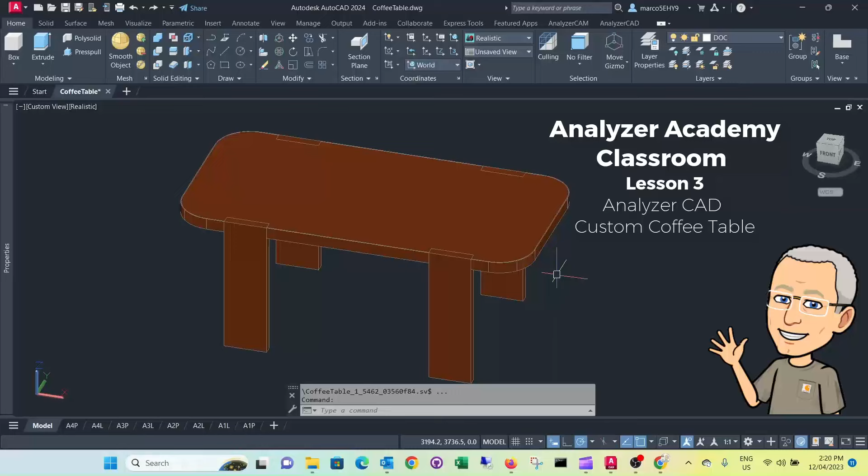Lesson number 3. Here we want to draw a coffee table. It's an oak veneer top with solid edges, 2mm solid edges, solid legs, and it's all dowelled together. Start with a new drawing. Now the best is to draw a small plan.

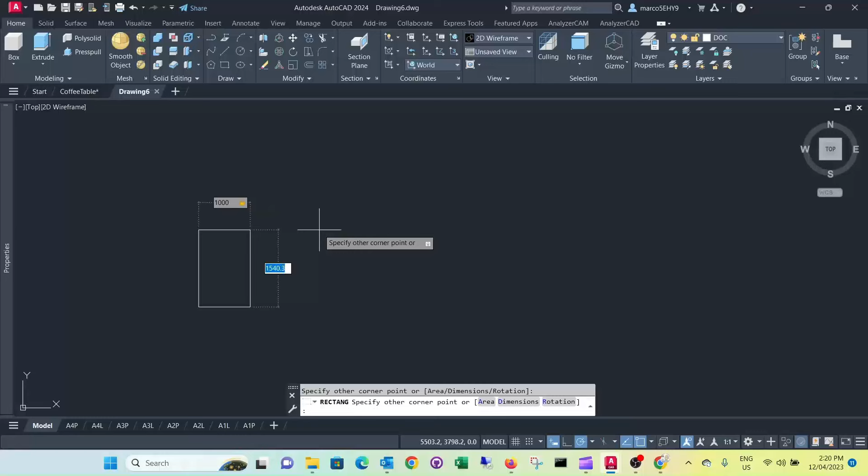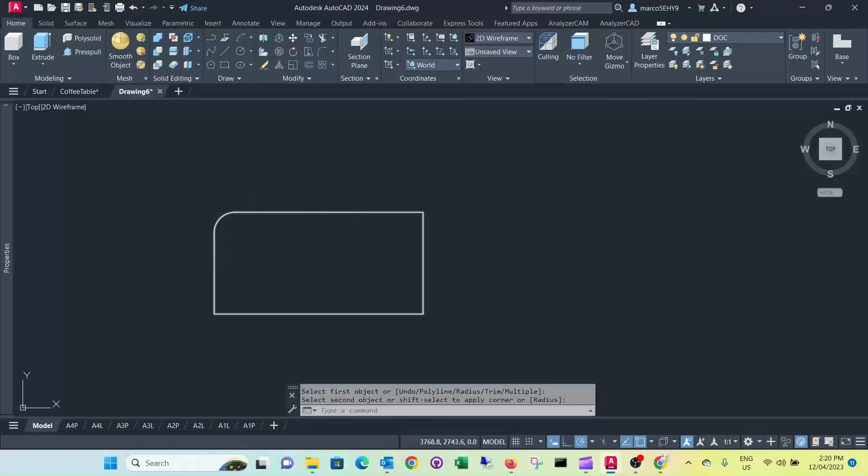Table is 1000mm long and 500 wide. And we have rounded edges, so we fillet them at 100mm radius. 100. Now we want to draw the legs. Again, they're 120 wide and 25mm thick in solid.

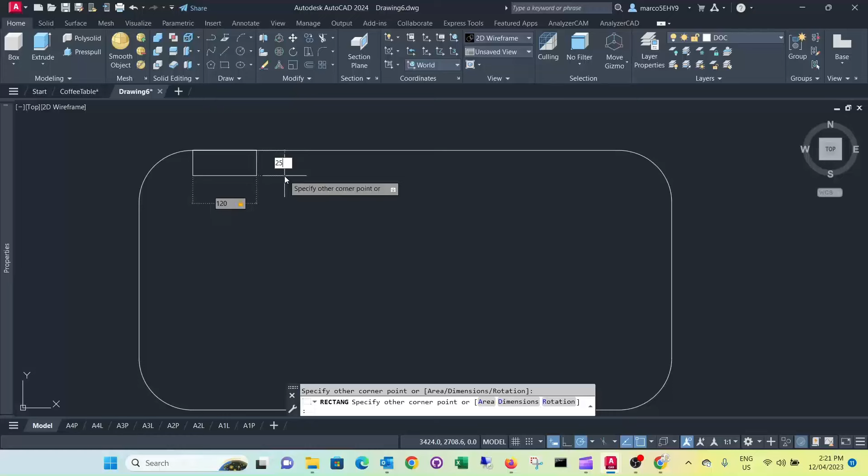Now we probably don't want to have them right in the corner here where you have to glue the edge on. It would probably be too much tension, so we want to have a bit of a flat spot for the edge to be glued on. So we just move them another 50mm internally, another 50mm. Okay, now we're going to mirror them around.

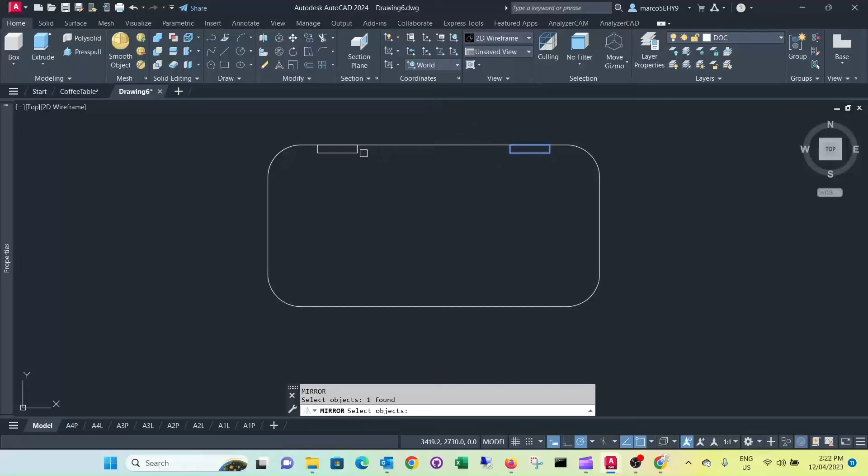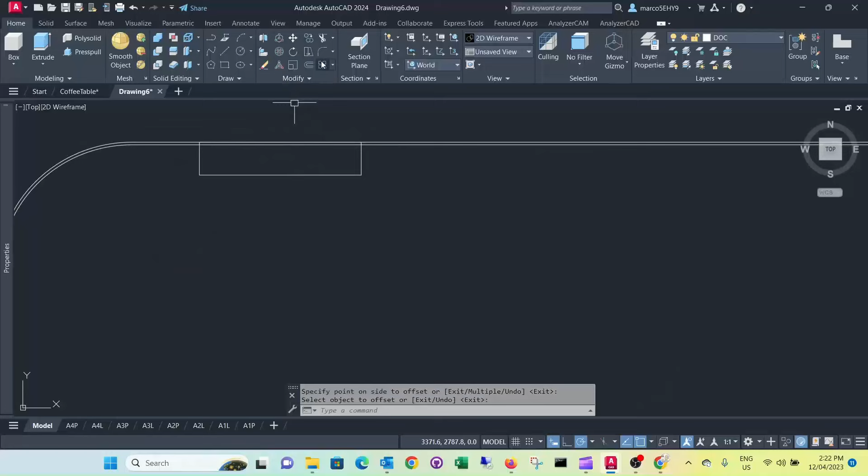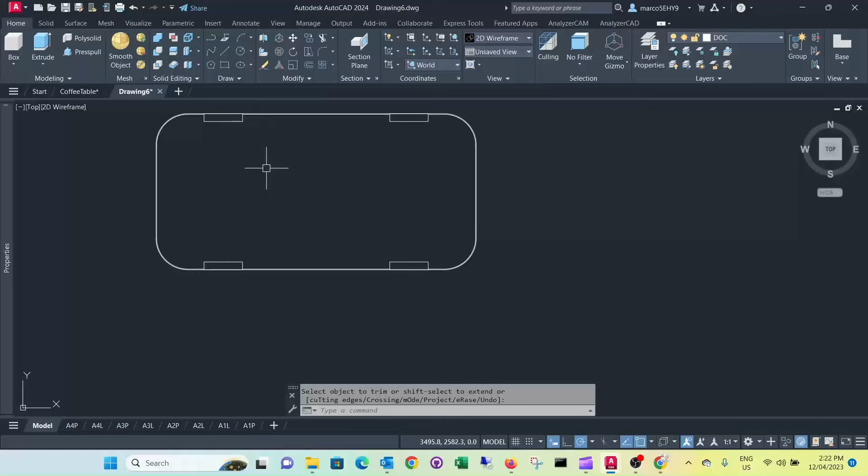And we also want to show the 2mm edge, so we just do a simple offset there. This time 2mm. Probably don't want to have an edge here, so we trim that off. So now we're basically ready to draw things in 3D.

For the core of the board that needs to be edged, the easiest to use would be Presspull. Just click in the internal area of our table, and since it's veneered board 32mm, it's going to end up with 33, so we put a thickness of 33 in there. Now we want to elevate it to the right height.

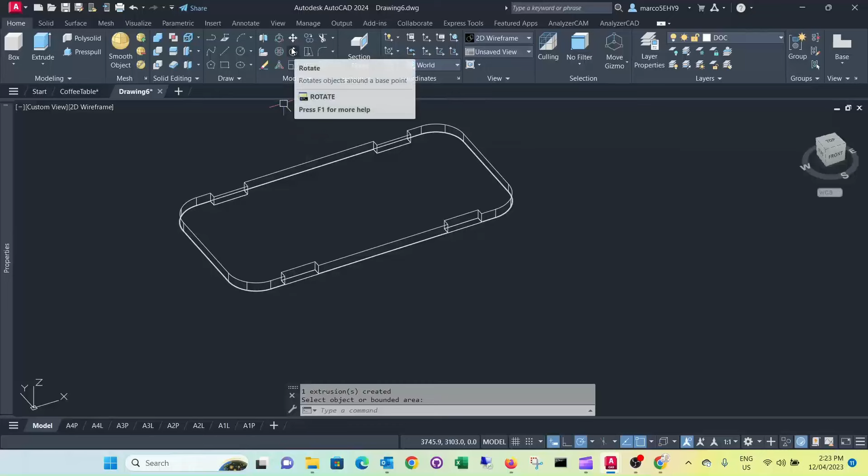It's 400mm high, so we can simply use the 2D move command. We click anywhere on the drawing, we move it up to 400. Now it's obviously 33mm too high. We could have made a calculation, or we can just simply move it down. We use this corner, we move it down.

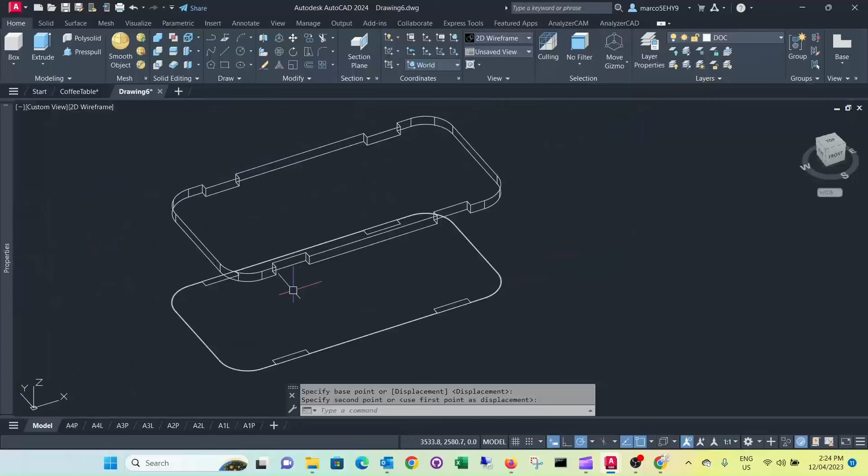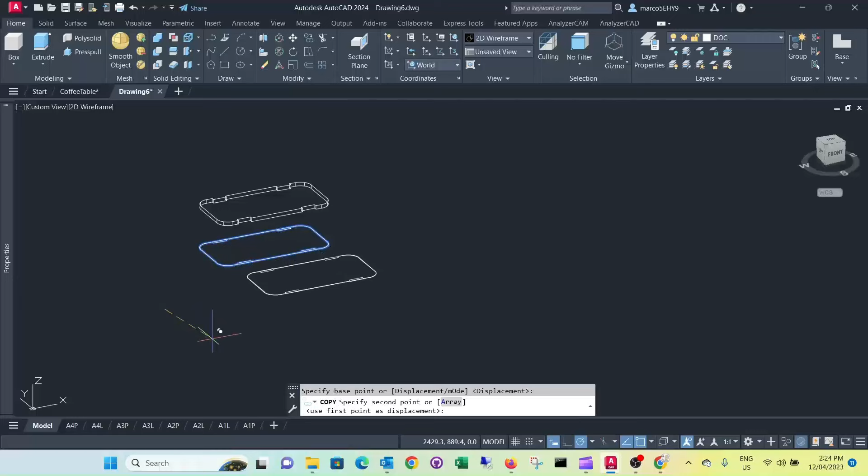Now what we probably want to do is copy our 2D drawing, because we want to extrude some edges as well. It's a bit easier to use the extrude command, so we want to do a copy of this. Just copy that across. Now the next thing would be the legs. We just draw a box for that. And we bring it up to the top surface here.

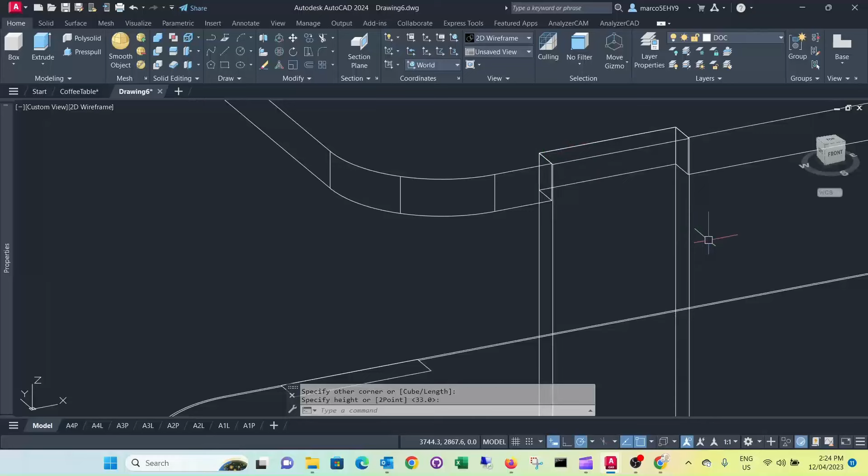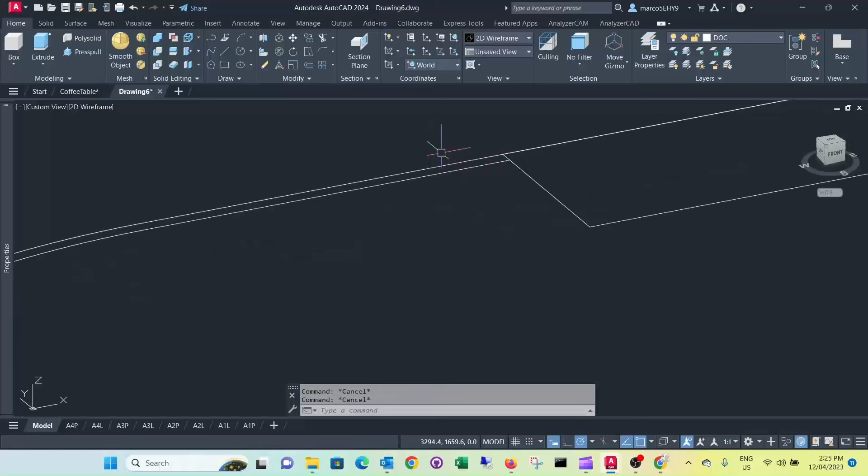Now our edges, they're a little bit hard to press pull because there's a very small area here, so press pull doesn't work that way. If you try to use press pull, it won't give us that internal area there. The easiest is to draw a polyline and extrude it. That gives you a solid. So all we need to do is trim some of the lines here.

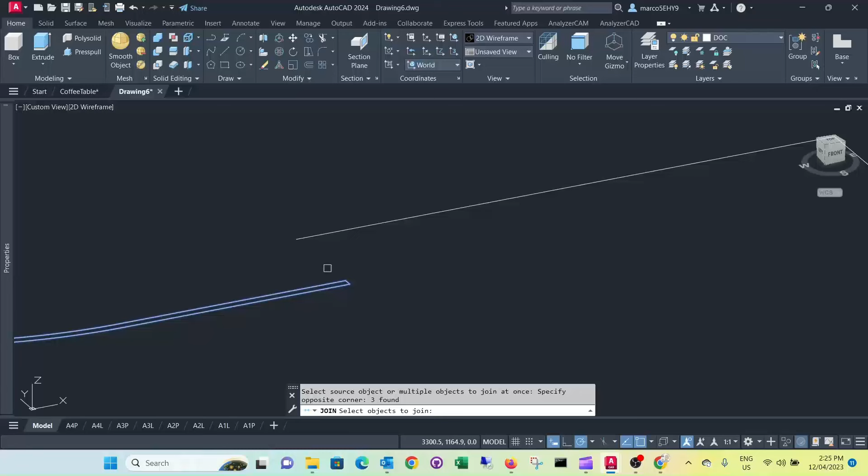Now we're able to join those lines together. Use the join command. Select the lines. Now this one is a polyline that can be extruded now to 33 millimeter. 33, and that's basically our edge now.

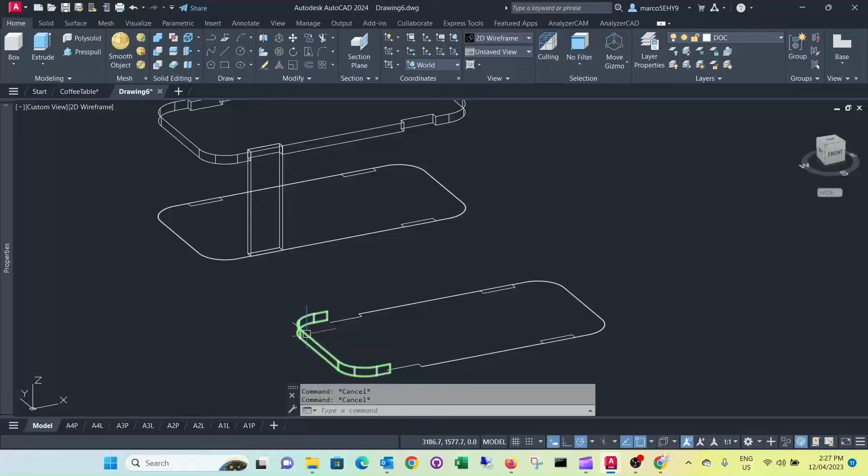These edges are only for display purposes. AnalyzerCAM manufacturing has its own edging system, so we don't really need to make it part of the Analyzer assembly. So they're just for illustration purposes, once we do our 3D drawing, we want to show edges there. The next step now would be to put part properties on those two parts. Use AnalyzerCAD part properties.

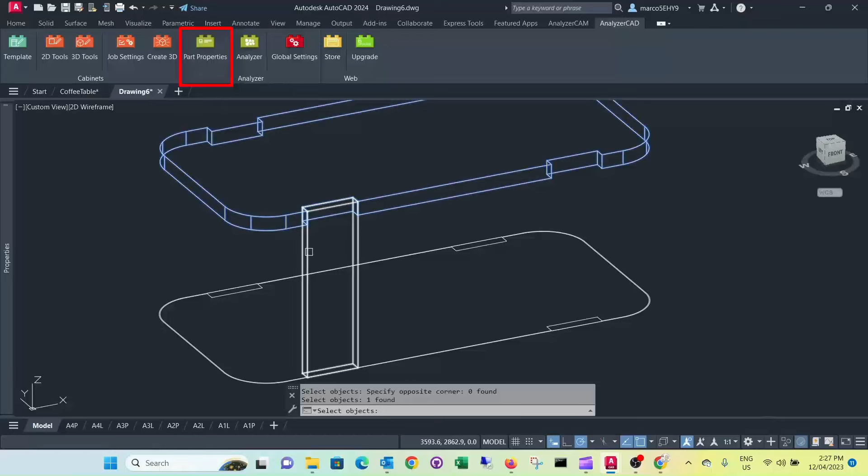We select the benchtop first, and then the leg. So part name, we call it top. Material. It's any material. You can select something from the existing code, or you can just enter your own material. Call it now oak veneer particle board 32.

We don't want to nest it, so we don't need to put anything in user 1. User 2 is usually your edges. We want edges all around, so we just simply select A. And now the most important part is we actually have to give it an assembly. There's no assemblies at the moment, so we select new assembly. We call it coffee table.

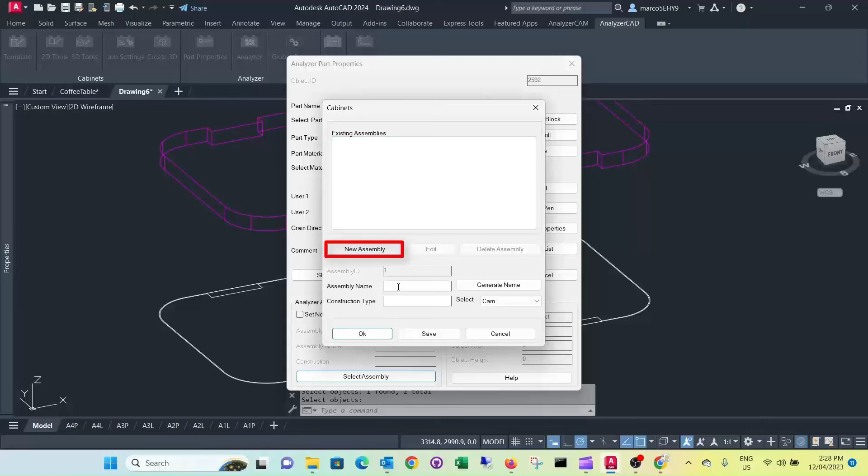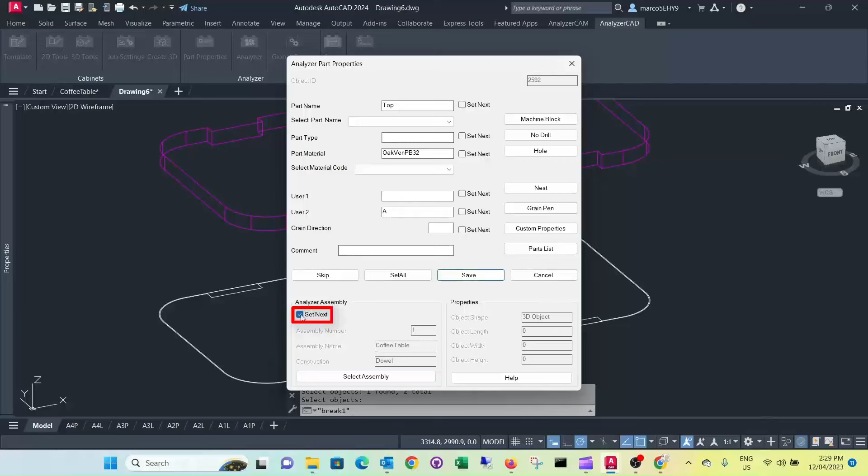And we use a construction type. In this case, we want to use dowels. And that's all. Now it's been copied into the part properties. Since the next part is part of the same assembly, we select next. We save this one now. So our next part now is our leg.

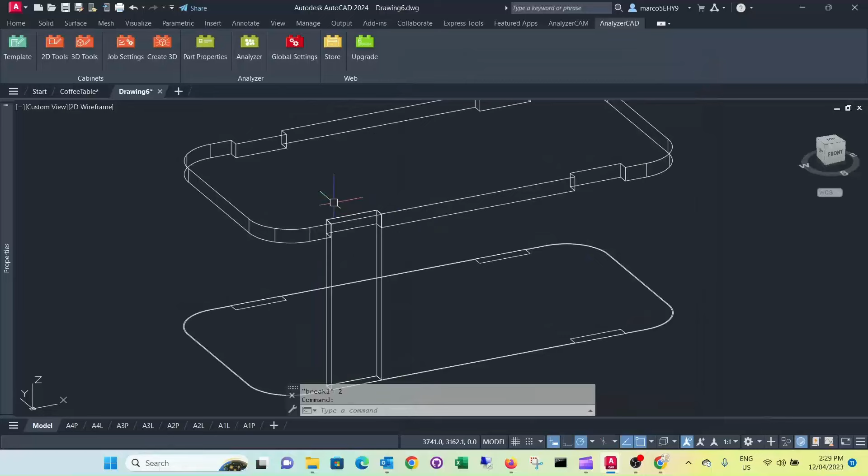The material is solid oak. We save that. That's all we need to do. Now those legs, obviously, we can mirror them around. Saves us adding part properties to 4 legs.

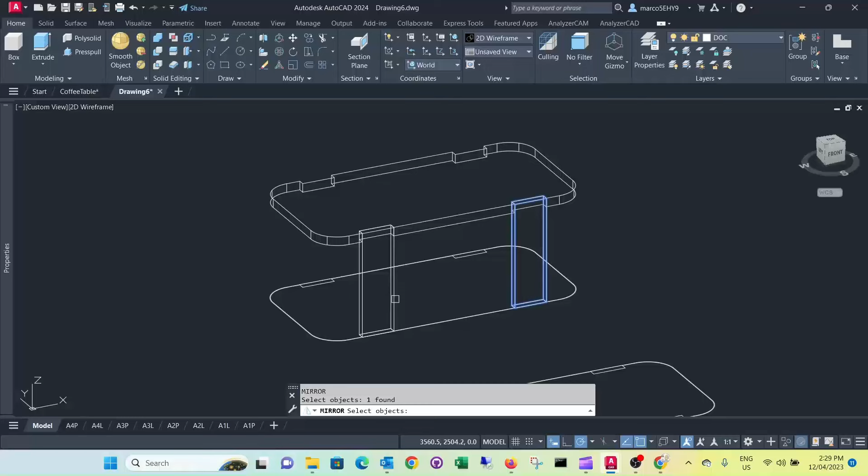We just simply use the midpoint of that line there. It should give us exactly the center line of the table. The next step is to complement the drawing by moving the edge to the place where it has to be. Just move.

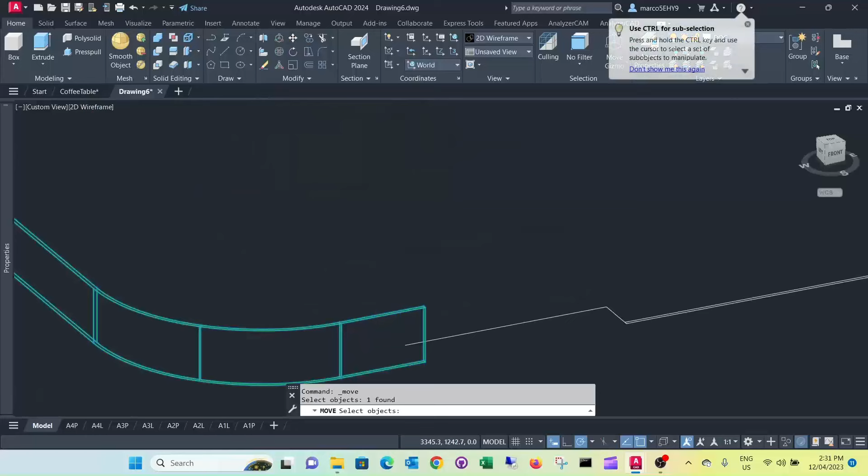And we select the point that we can select as well on our table. Now we just mirror that to the opposite side. Select the edge. Select the midpoint. And now we just need to complement this edge here. So we can simply use our box command.

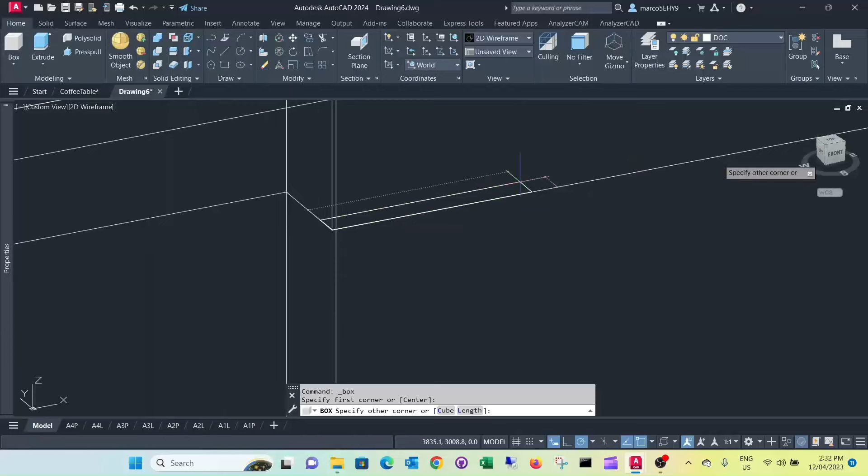Select the bottom here. And we use this corner here. We select it diagonally. It gives us a box straight away. Can match the two properties. Match properties. Okay, so now they're on the same layer.

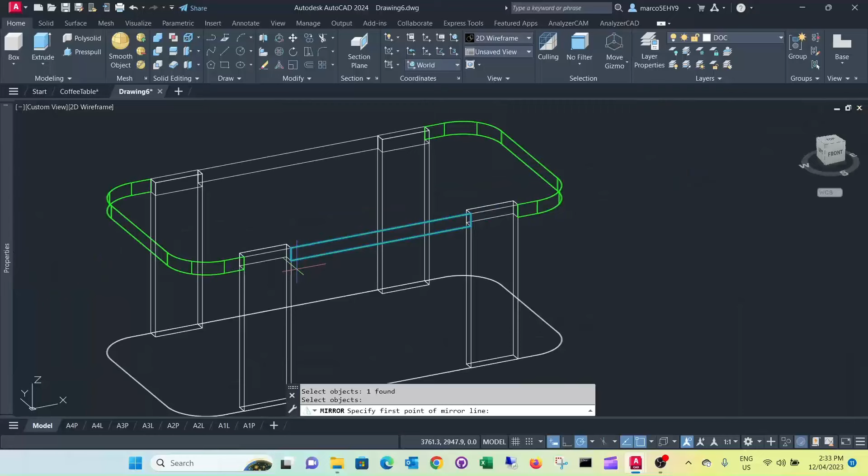We move that around to the opposite side. Select the midpoint. And use our polar tracking for this.

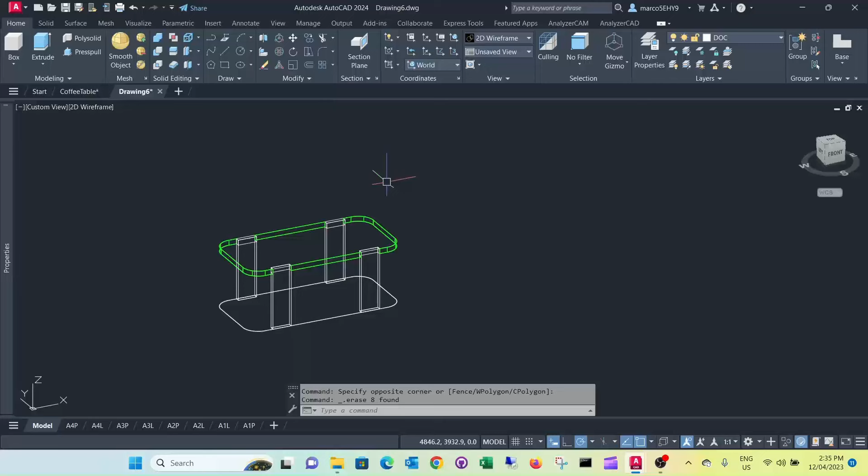There's a couple of commands you can use in order to extract sections or plan views for our workshop drawing. So we can select the top view. We use Flatshot for this, but first we want to change the layer that we draw in. In our case it would be board, depends on your company settings. We select Flatshot or simply type it in.

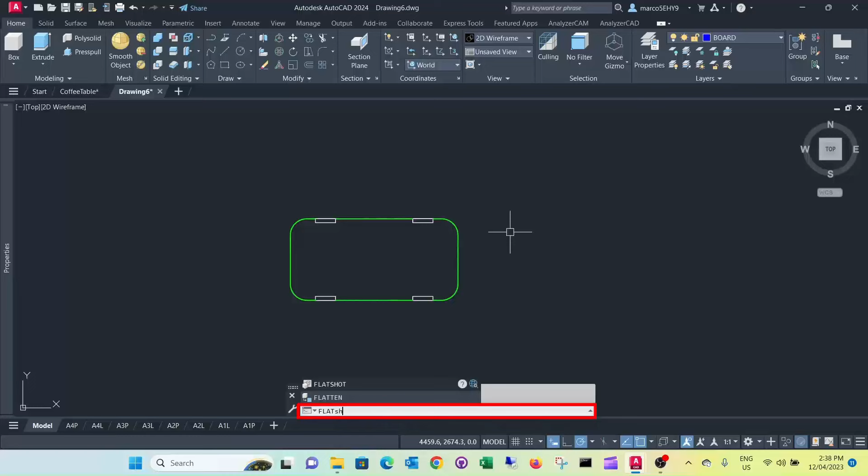Now we want to insert it as a new block. The color we want to keep by block. Obscured lines, we don't want to show them. Now if we press create, we place that somewhere here, and it's drawn it as a block that we can manipulate or move around.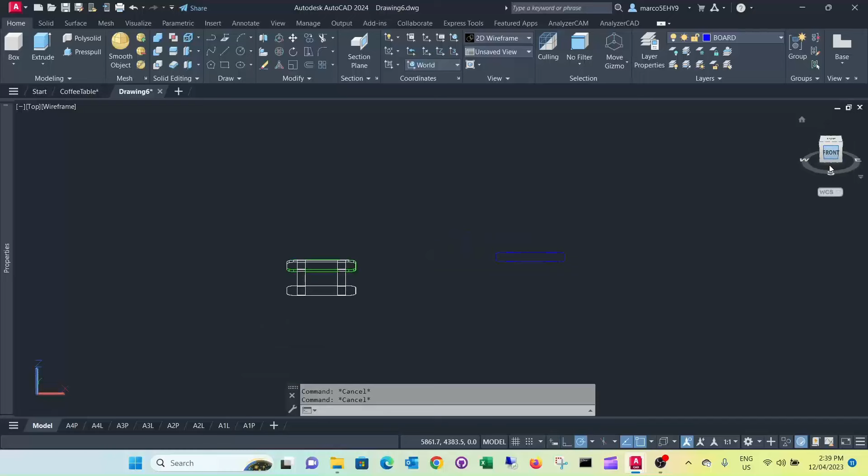We can do the same thing for the elevation. We just change the viewpoint, and we use Flatshot again. Basically we use the same settings for this. We create it. Now it shows it sort of edge on, so if you use your viewpoint orbits, you can actually place it close to where you want it. You just place it somewhere near the plan view.

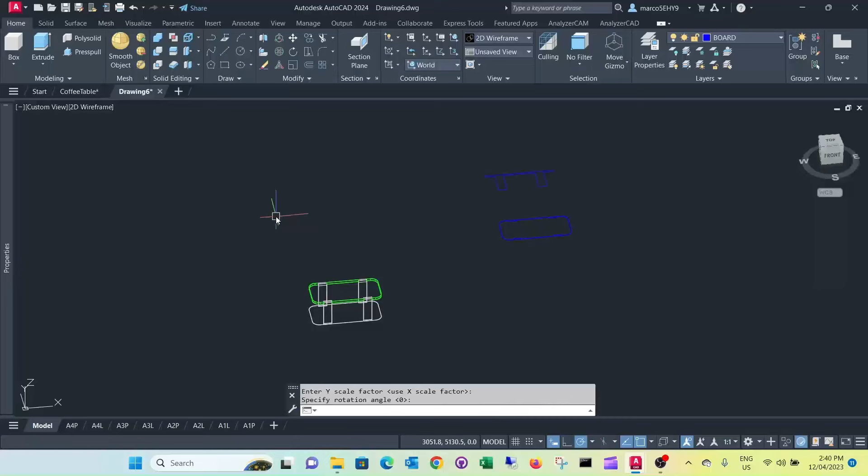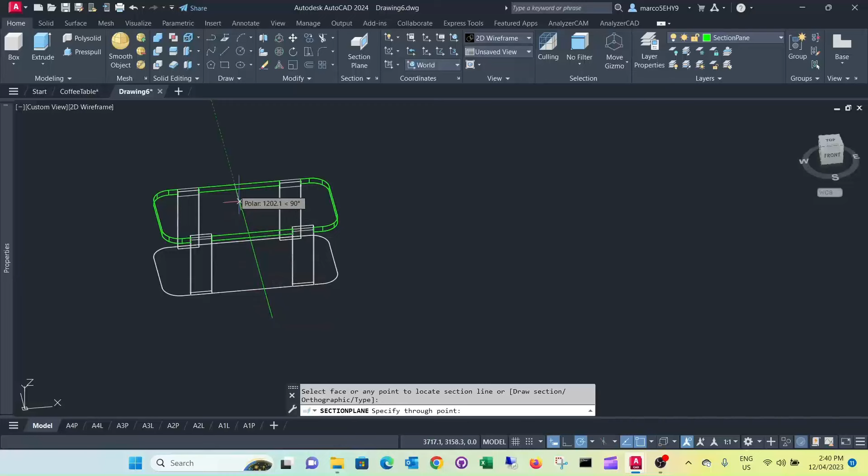In order to do sections, we use the section plane command. Again, I would change it to another layer. I've got one already ready here called section plane. Select this, and now you can put the section plane into your 3D drawing where you actually want to cut that table.

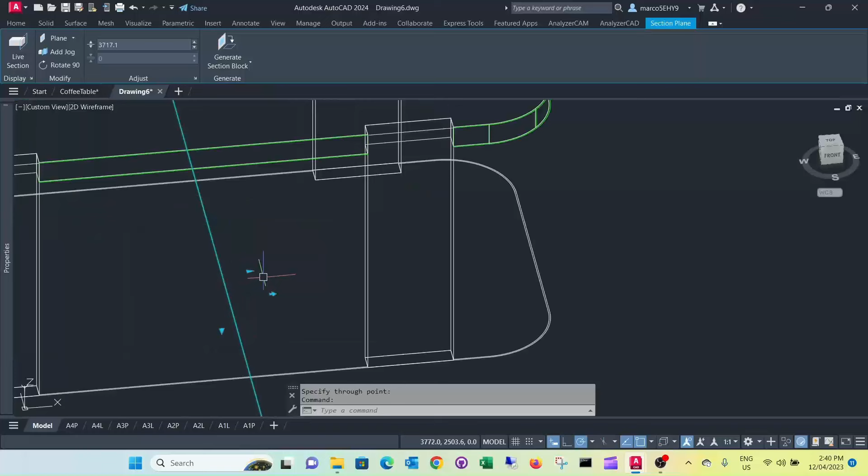Now, by default, it selects live section, so it cuts part of it off. I generally don't use that. I turn live section off, and now my table's complete again. It gives you directions where the view is going to go and where it's going to cut, and you can manipulate this around. If you use other things like conceptual, it actually shows you the whole plane where it is and how it cuts through the table here.

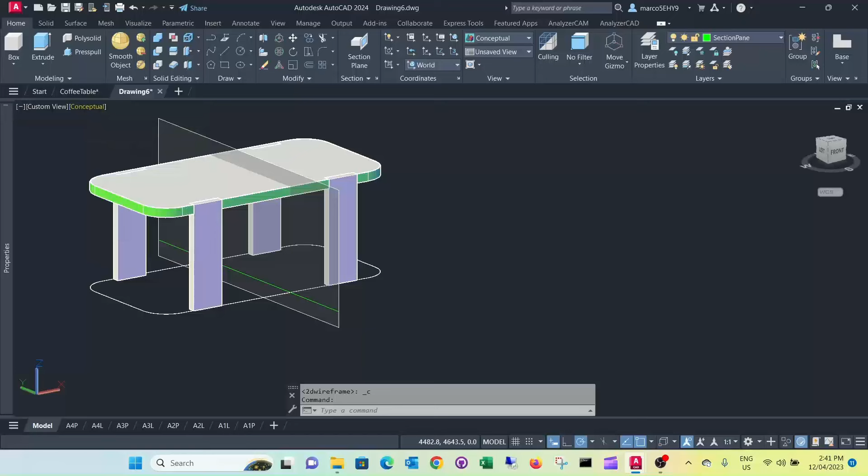Now in order to create that section, we click on the line. It gives us the option to generate the section block. Now this is quite a powerful command, and it gives you a lot of settings there. And you can manipulate things around. Basically, you want to do a 2D section. You want to click all the objects.

If you have complicated drawings and you want to have a section only of part of your objects, you select those objects. Otherwise, you just include all objects. You want to insert it as a new block. And the section setting, this is now quite important. So we can say, all right, we want to have it by a certain layer, we have our board layer that we really want to have it drawn into, so that the color will be by layer, our board layer.

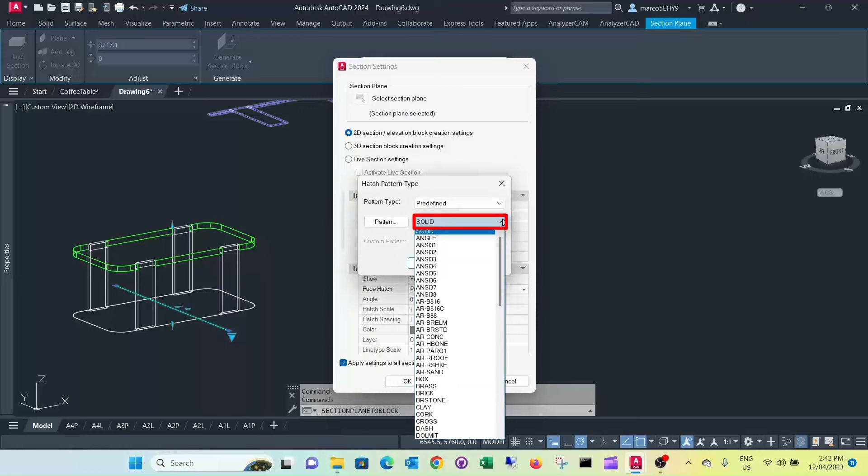We can actually use an intersection fill. That means we can do hatching on boards. The preset is solid. We can select something like a cross line section, like an ANSI 31. Probably have to change the scale a little bit to 5, depending on your drawing styles. The color, I think we want that by layer.

The layer, if you have a hatch layer, you can choose that. The background lines, you want to show them, yes. The hidden lines, we probably don't want that. We turn that off. And again, we want that in our board layer. The cutaway geometry, no, we don't want to show that. And curve tangency lines, no, we don't want to show that either.

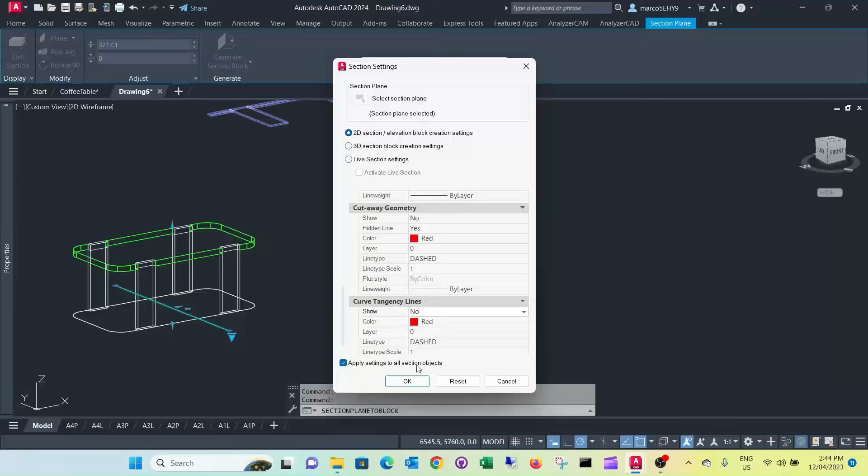You probably want to save this in your template, so you have that all set up for your company standards. It's okay. We create our section, we just place it somewhere there. And again, it's a block. Going to plan view. The only thing it doesn't do is it doesn't draw your bottom lines, so you have to do them yourself. Probably want to go into a different layer here, possibly your wall layer or your document layer.

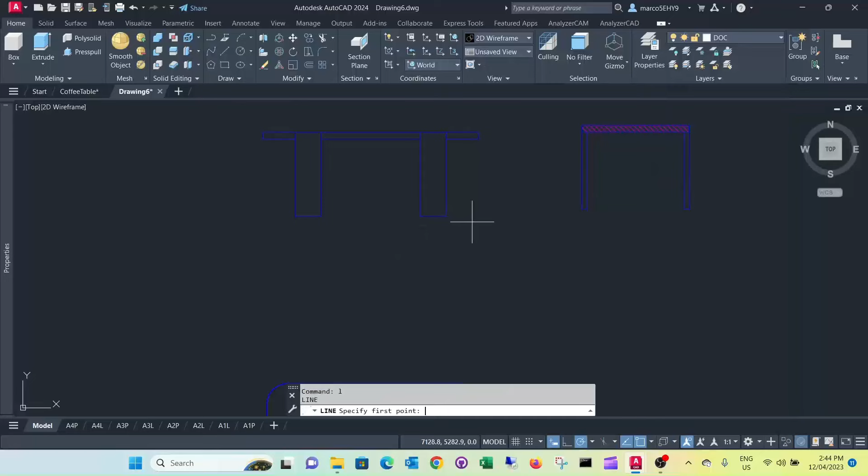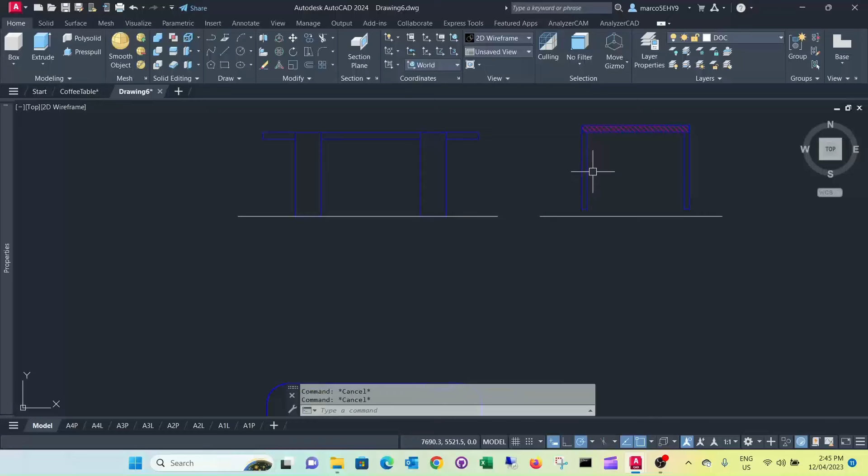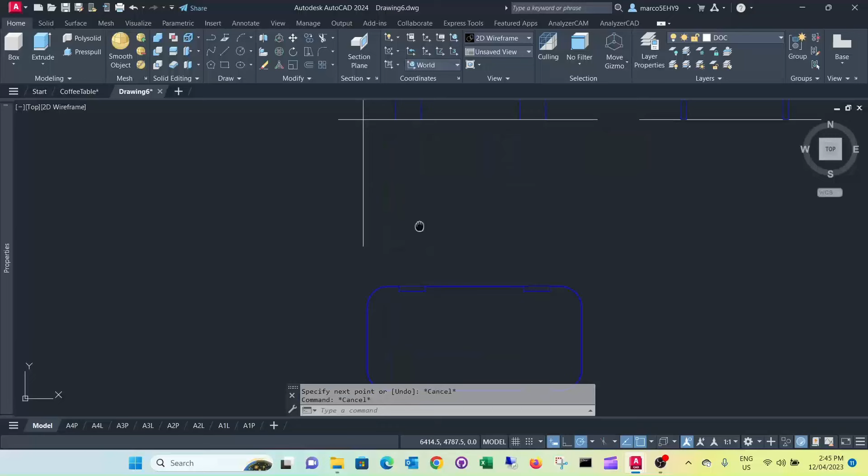Draw a line, just to complement the drawing. It makes it a bit easier to read. I want to extend this line here. We line up our section. Same thing here, we want to do a quick construction line. Use the line command for that. Line up that edge here with our plan view.

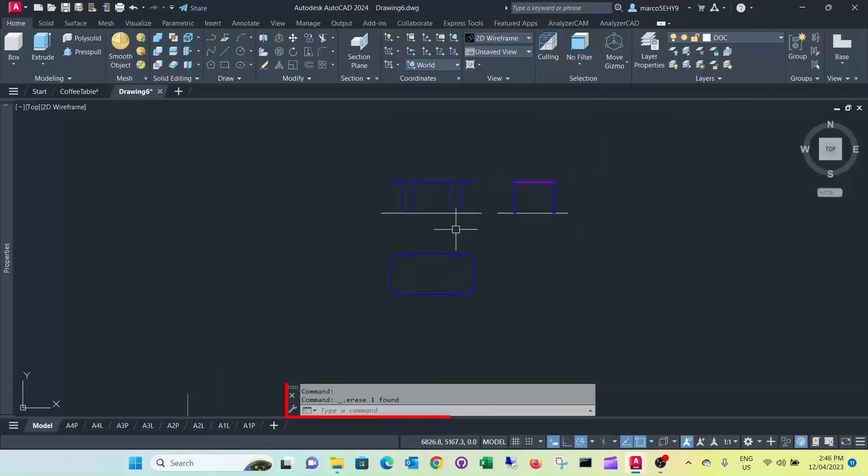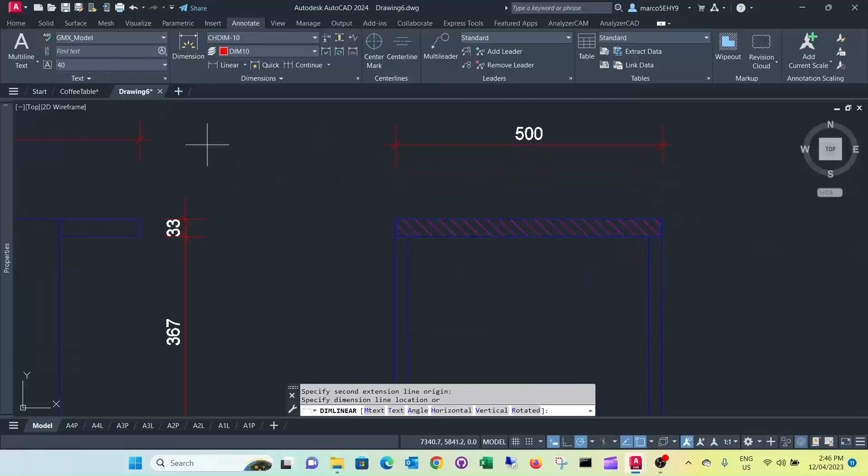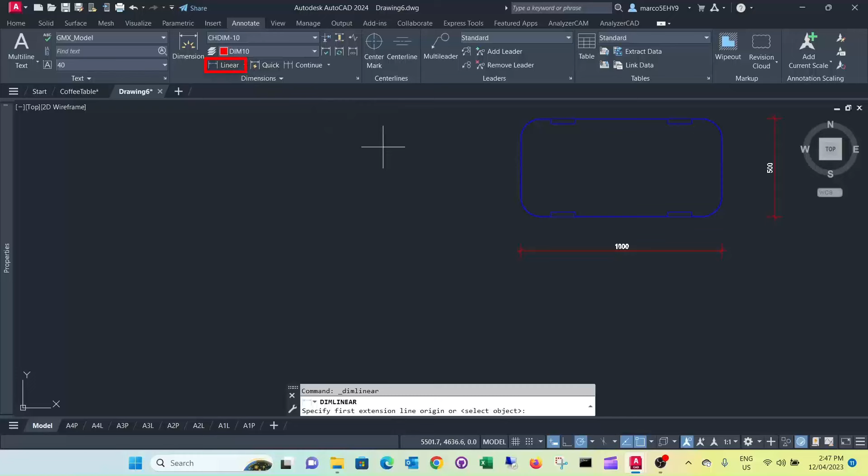That's all nice and in order now. Now you can basically do whatever you want. You can put measurements in here. Then you can put it into your layouts.

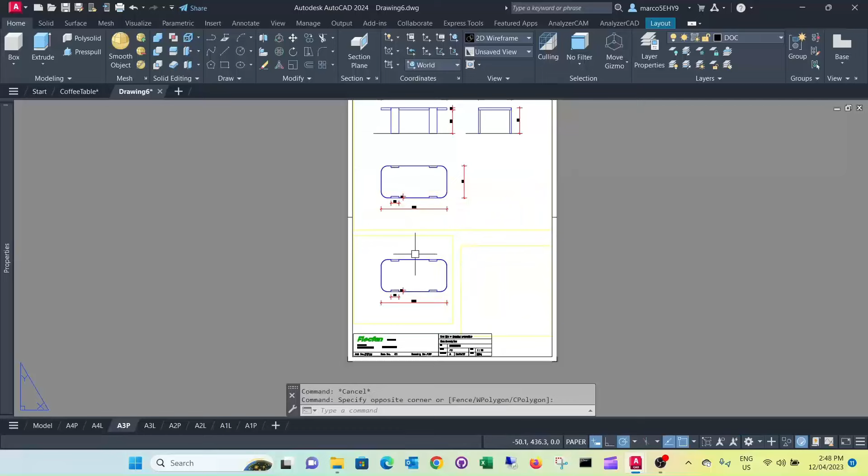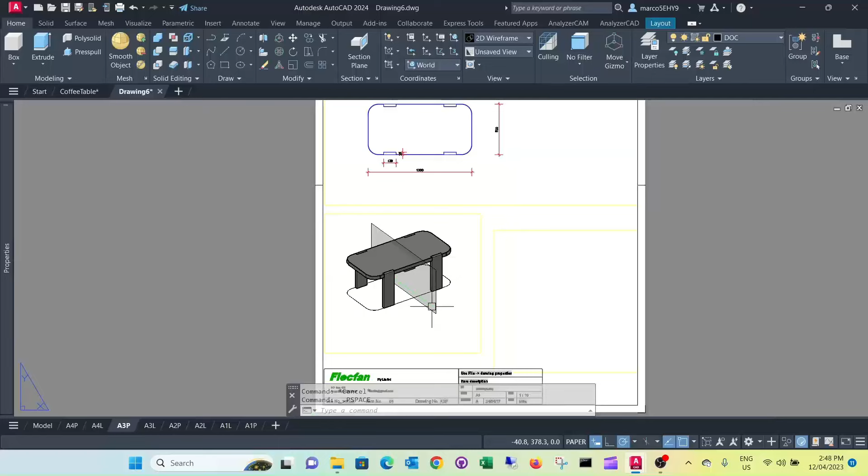Select something like shades of grey. You can freeze the section plane layer. Freeze it in this particular viewport here. It's just a quick way to show you how we can relatively quickly extract a workshop drawing out of a 3D model.

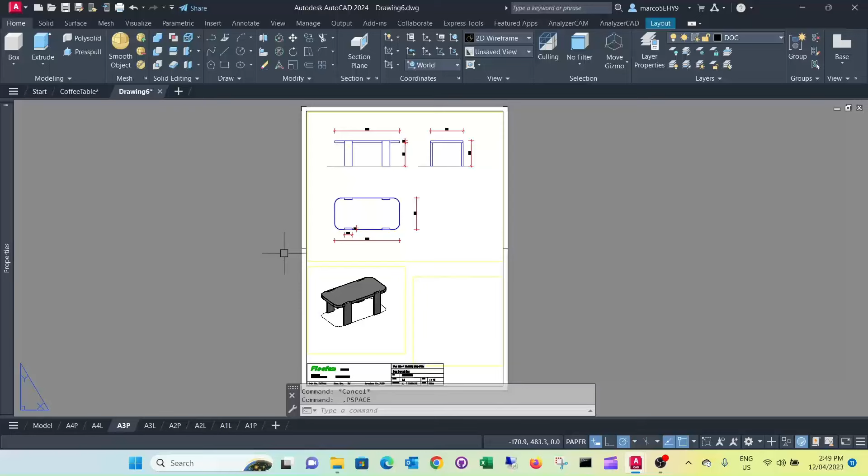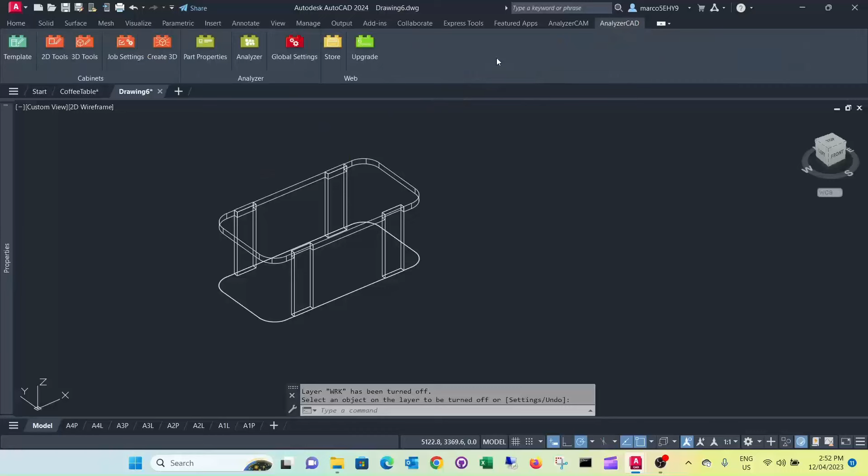Now you want to export this to Analyzer Manufacturing. It's probably a good idea to turn off a couple of layers here. We don't really need the section plane. And we really don't need the edges, since Analyzer is working out the edges by itself. So now we go into Analyzer CAD, select Analyzer button here, and we select our parts. Select our job number, 333. Lesson 3. We'll call the number 141, and that's all we need to specify.

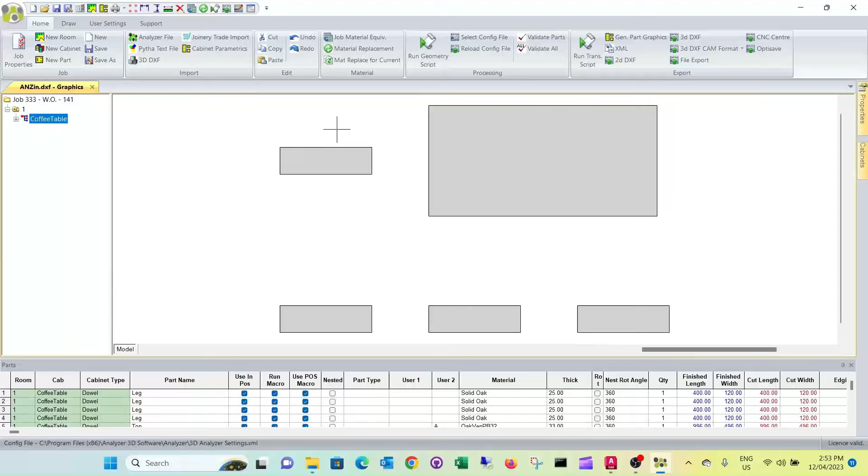Here's our coffee table assembly, and now our geometry script has been run. It just shows us the parts. Now it gives us all the machining, the tool path and drillings. It's rounding off the corners here. It cuts out the legs and it drills the dowels for the legs.

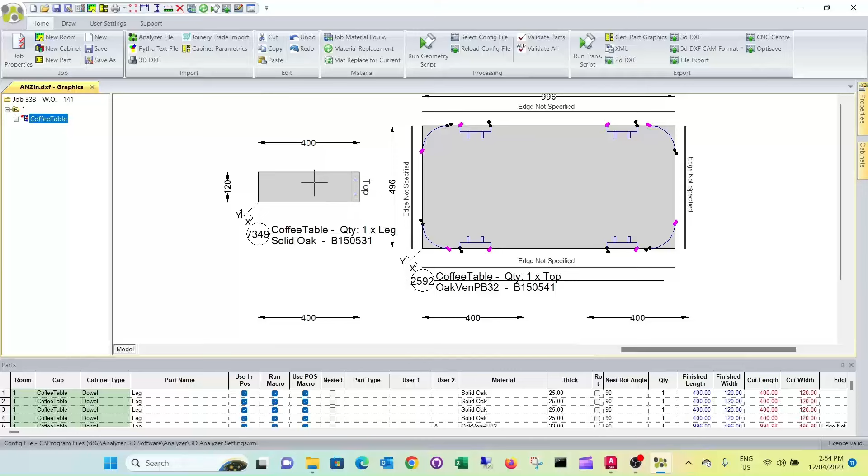Now the next thing we want to do is specifying the edges and materials. We go to job material equivalents. Our oak veneer board, we can say we call that board oak PB 32mm. The edge material is oak 2mm. Use 2mm roll edges for this. We don't need to specify a thickness since we already taken care of that. And the solid oak, we just leave it as it is.

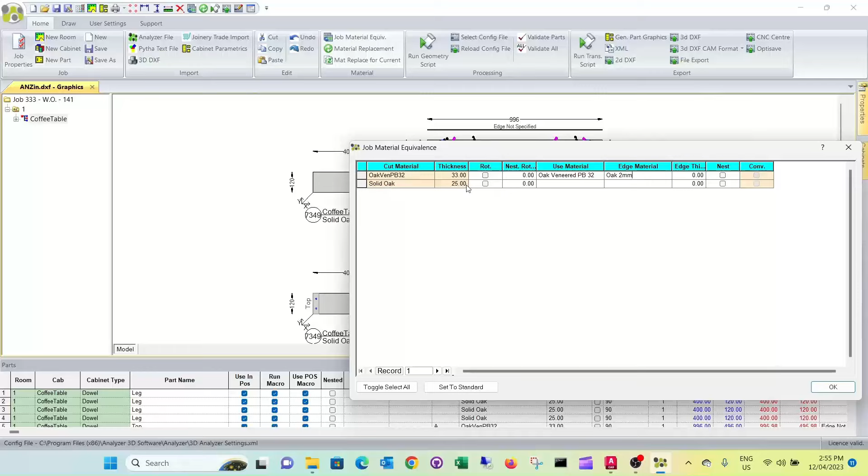It's okay. Yes, we want to change this. We run the geometry script again, and now it's given us 4 edges in oak there. We can save this. Now we can have a look at the cutting list. So our standard cutting list. We have our oak veneer particle board here, and the 4 legs in solid oak.

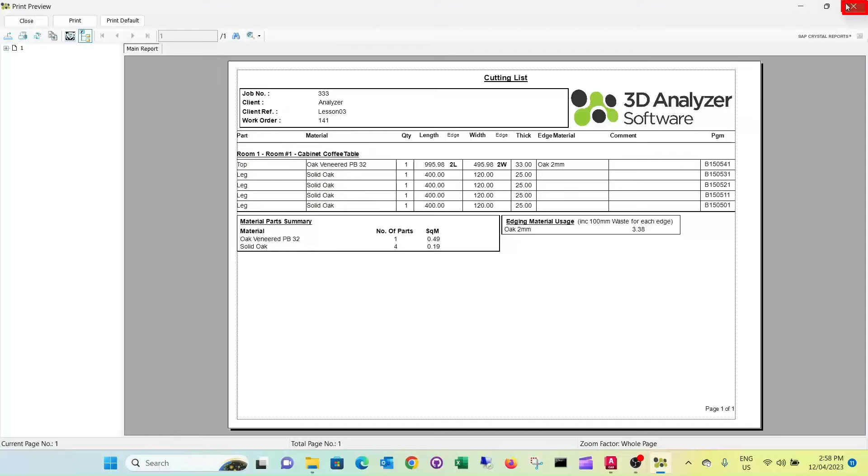To send the cutting list to the beam saw, you would typically use file export for this. You got different export formats, so you use the OptiPlanning one. Press OK. Now it's been saved in this directory under lesson 03, and it's a CSV file that you should be able to import into your OptiPlanning software.

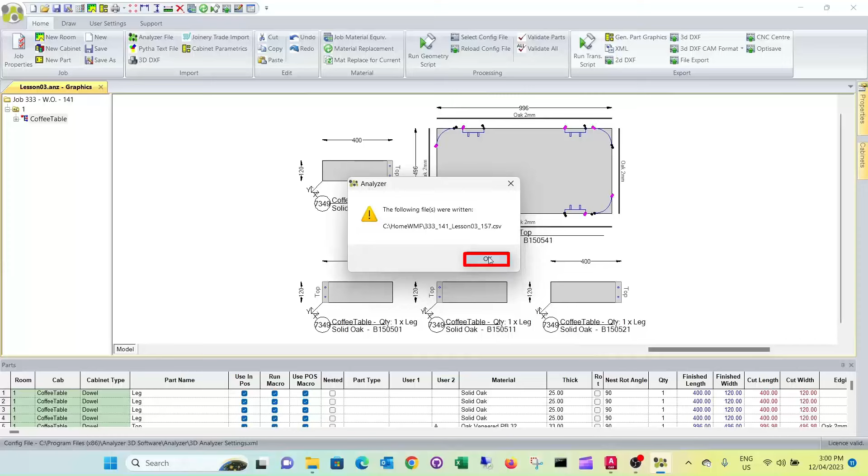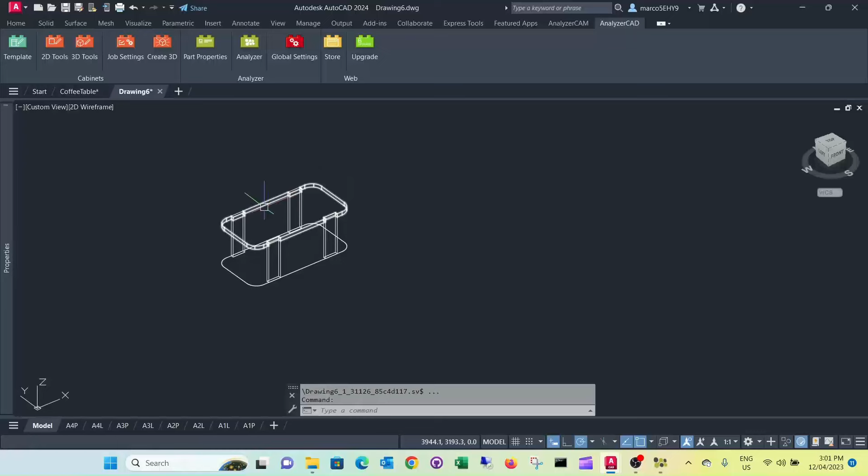That basically concludes lesson number 3. So I'd like you to submit us the lesson 3 file from Analyzer Manufacturing, as well as your drawing file for your coffee table. We forgot to save this, so definitely save this. And it would be lesson number 3 in this case. And yeah, please send me that file too. And that concludes lesson number 3.